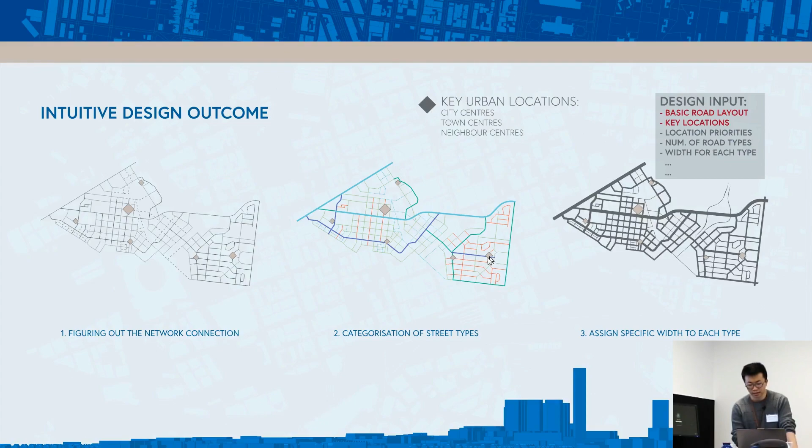Once we got the results, I ran a test against the connectivity from these key urban functions like the city centers and town centers, and generated a heat map, basically representing which road is heavily used. These blue paths are not very much used, so they become less busy, and we bring that information into changing or optimizing the road width. So that's the result in green.

So if you look at left and right, it's actually quite different. There's a huge difference between design by intuition and algorithm-generated outcome. Obviously, we're not taking this for granted and saying this is the most ideal solution. That's not the case because there are other factors, but at least that highlights the difference: when we think we need the road to be constantly wide across this whole site, when you measure the connection, you really don't need the road to be that wide.

Obviously, we need input from specialists from different disciplines like road designers, but this is just one example. At the same time, when a road type and width changes, the data is also getting updated. So this is mainly about the NDA, net developable areas of the blocks enclosed by the road network.

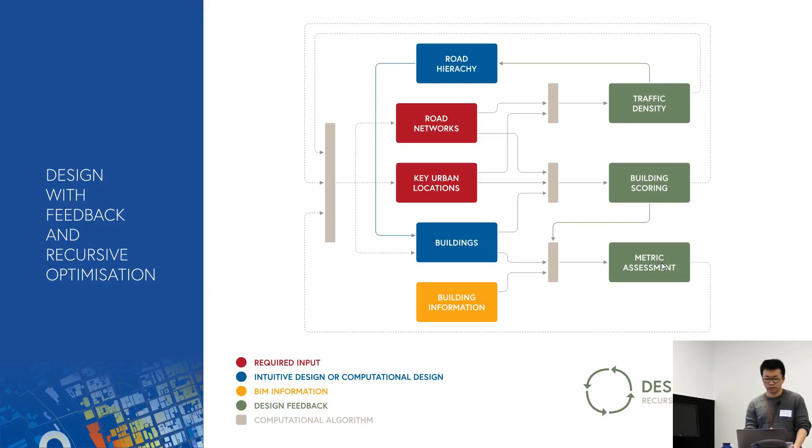So overall, they'll be able to provide a metric assessment—for example, we want to put a school somewhere when we're aiming to cover 75% of the residential communities within that area. So this is the metric assessment we're running. And this whole process is a recursive process, basically cycling itself until we tell it to stop, until we pick the ideal result we want.

Two parts about this project: quality and efficiency, as I mentioned in the very early beginning. We have functions of parametric city planning, traffic assessment, and data-based city function coverage study. So this is about improving the quality.

That's something the human brain simply can't do, no matter how much time or resource is invested. And for the efficiency part, rapid road network and building prototyping, BIM data exchange management, this is more about speeding up the workflow. You can still do it traditionally, but it just takes heaps more time.

So there are two key concepts used in this urban assessment. One is coverage, which throughout the whole project is more about walkability or traveling distance. In this map, we have square blocks representing urban functions, and diamonds are small buildings.

Traditionally, when people design something like a station and assess the surrounding coverage, say a coverage of 300 meters, they draw a circle from that point with a radius of 300 meters. But we know that's not the case, because the real coverage is going to be a lot smaller, depending on the complexity of the road fabric or how complex it is to travel from point A to point B. So the real result is pretty much an irregular polygon that we don't know in advance.

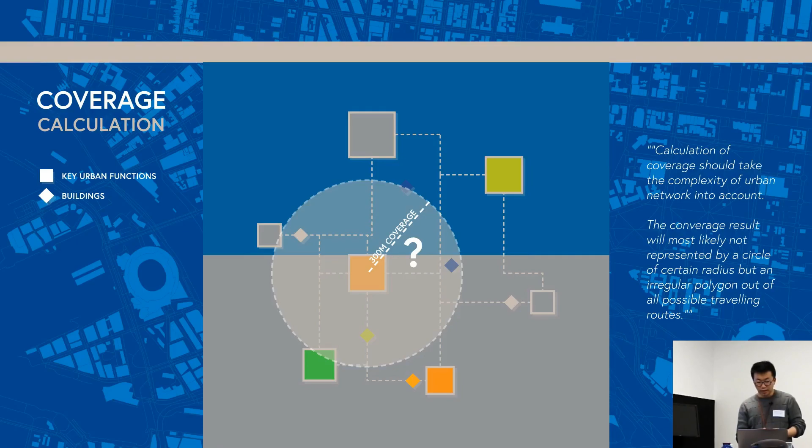But that actually makes a huge difference to urban design. This is a demo of how the real traveling distance is calculated. For example, we have an urban function with a design coverage of 600 meters, and these white lines with number tags show the actual traveling distance from this dot to the central urban function—here it's 521, and here 487. It spreads out, but obviously there's no coverage here because that's a lake, and the only connection across it is through these three bridges.

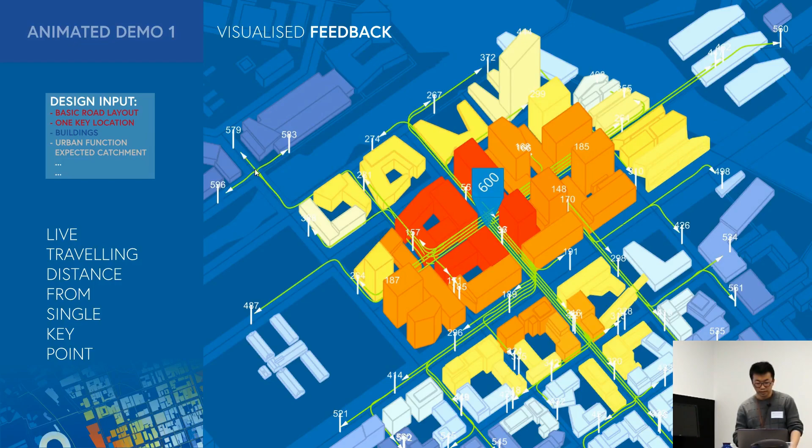Bringing the same concept to multiple points: we have a coverage of 600 and two small centers with design coverage of 400. It's the same concept applied to multiple urban functions.

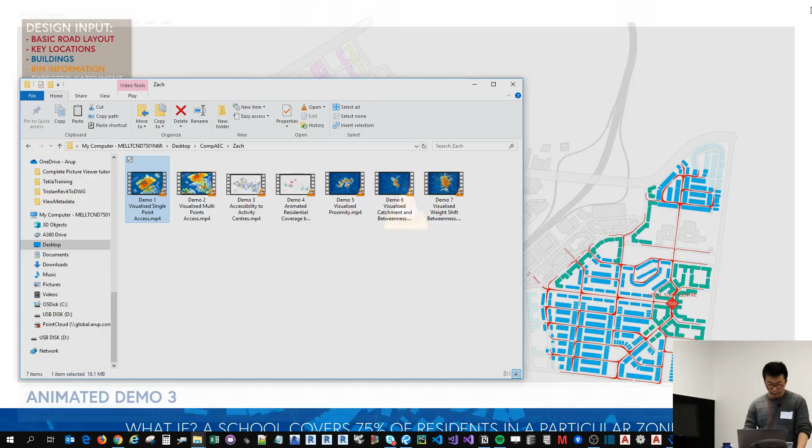I'll quickly show two animated videos. That's basically a traveling simulation from the center to the end, and the same concept applied from multiple urban locations.

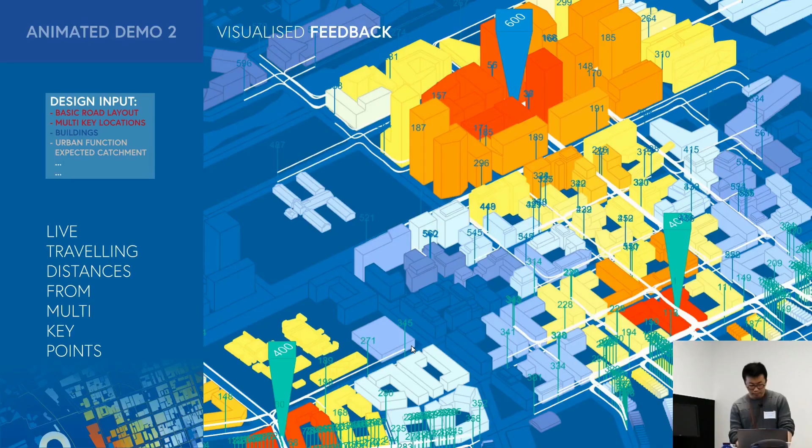Back to this urban design project itself: we brought in the BIM data and linked that function with the coverage testing model. In this example, we have a local town center with a design coverage of 1,000 meters of traveling distance, and the ends of these red curves show the extent of that 1,000 meter traveling distance.

These buildings in different colors represent different types—for example, green is medium density apartments, and blue is single family houses—and also show the percentage of service covered by this local town center. You may notice there's a bunch of houses at the corner that isn't covered. The solution for designers would be to either move this town center, add another town center, increase the design coverage capability, or change the road layout to provide better connections.

Now, all those inputs again need to be checked with the respective specialist, because, for example, you can't have an urban facility designed with a 5,000 meter coverage if you expect people to walk to the center instead of driving.

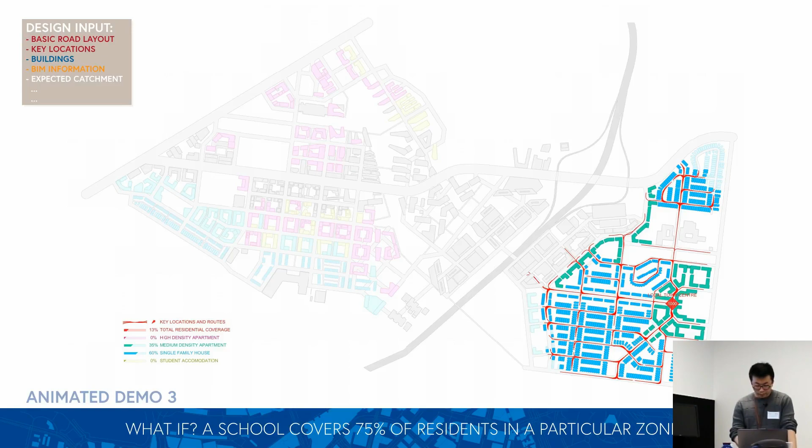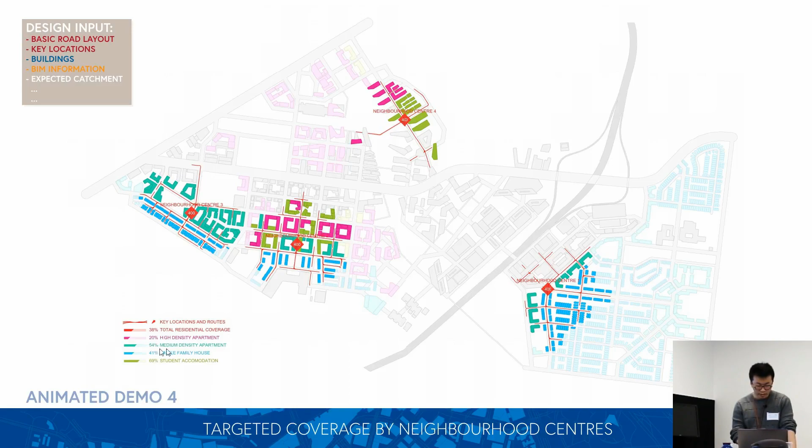Similar concept: four neighborhood centers turned on with 400 meters of coverage each, showing the percentage of coverage, and the same for community centers. Finally, if you have all functions turned on, that provides 100% coverage, but normally you don't do that because they belong to different categories, which I'll cover later.

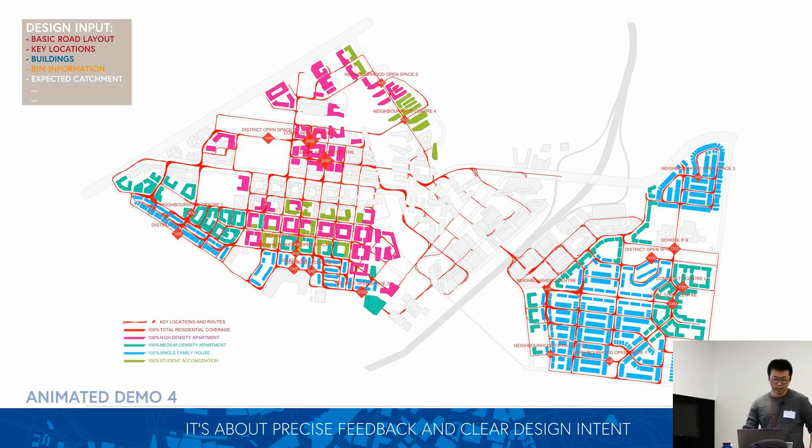Later, this kind of workflow derived from the original project into an R&D project, so we sought to replant it into another urban design project. I used the Melbourne CBD as my testing field. This picture contains 420 million calculations—lots of calculations. And there are two key concepts used in this scoring system.

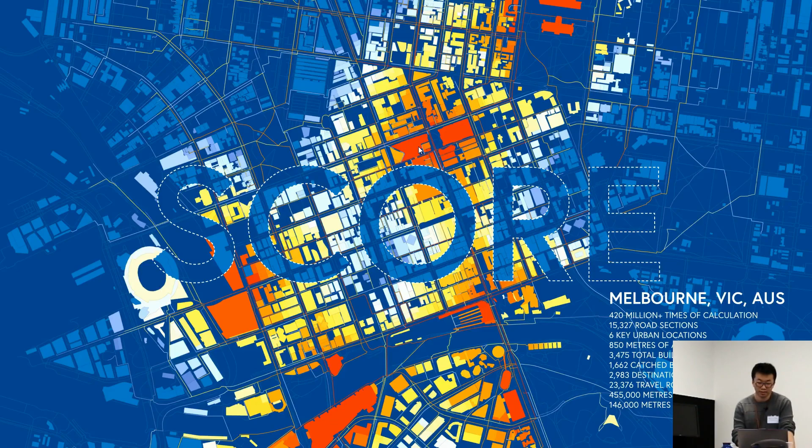This is about score. Each building with a different color has a score—the red color is a better score, and the cold, bluish color is a low score. And there are two key concepts.

One is proximity, the other one is betweenness. Proximity is primarily used to identify the level of accessibility from the urban element to key urban locations of a single category. Betweenness relates to multiple key urban functions with weighted considerations.

So my analogy would be getting milk. If you live close to a Coles or a 7-Eleven, you can get milk from either place. So as long as you live close to one supermarket, whether it's a big one or a small one, you get a nice score for proximity.

While for betweenness, it's more for the purpose of someone seeking to buy apartments in the city and deciding where to live. People who commute a lot might prefer living close to a train station interchange, and cultural lovers might prefer living close to Melbourne Museum, for example. There are different priorities being set between these testings, and it really depends on what sort of project you're designing and who the customers are that you're targeting.

So getting the concept visualized, it's the same map. For proximity, these buildings, because they're close to one of the urban functions, get really good proximity scores, and that one has the poor proximity score because it's not close to anything. But at the same time, for betweenness, this building actually has the best score because it has an average nice accessibility to all the surrounding urban functions.

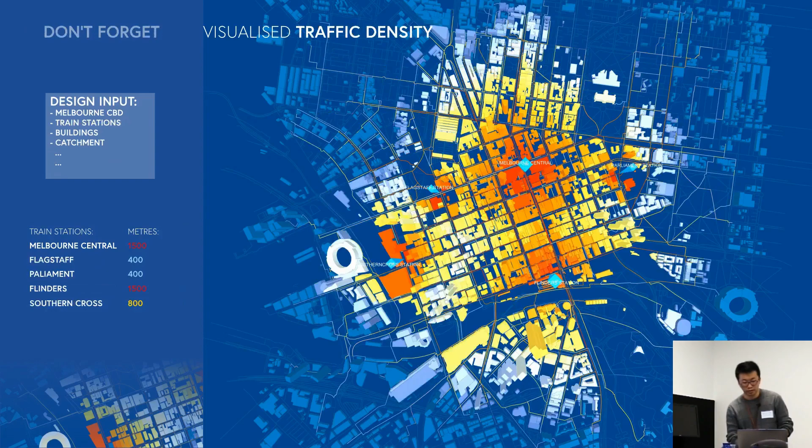It also provides a bit of density testing, as I mentioned in the beginning. All these curves in colors represent how busy the road is potentially. It's basically a calculation of when you do all these commuting simulations and you have overlap data. If one road is used 100 times and another road is used 50 times, then the one used 100 times is considered a busy road.

Obviously the building at the center, the kind of average of all of them, would have the best score. That means living here would have the best quality of life accessing all these facilities. Imagine you design an urban project and you move one of these functions around - you can instantly get the result of the most valuable buildings.

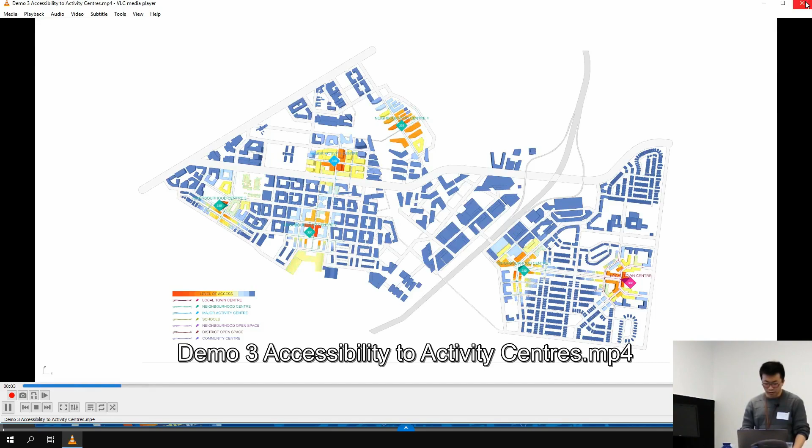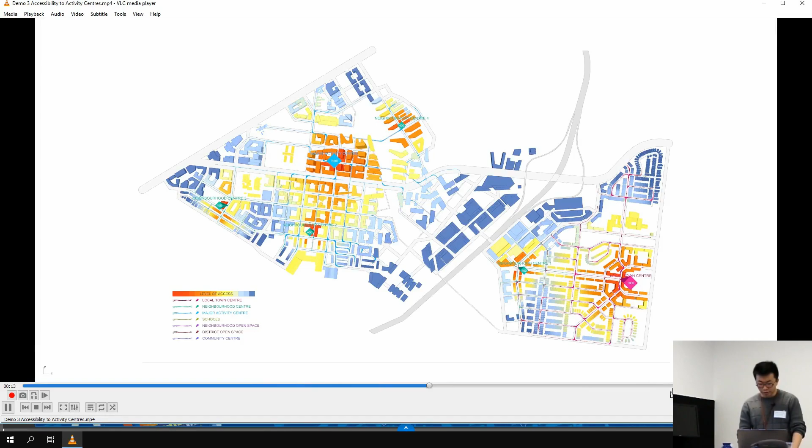When the coverage, or the design coverage number, grows, more buildings are covered. In the very end, when it reaches its maximum design coverage, you realize there are still a few blocks of buildings remaining in dark blue, meaning they don't really have good accessibility to all these design functions. So again, the solution will be either to change your road layout or move your functions.

And this is the coverage we talked about, utilizing the data from Revit. So estimating how much population is covered and what's the percentage of coverage for each type of buildings across the site, when you have these changing figures for the urban function coverage.

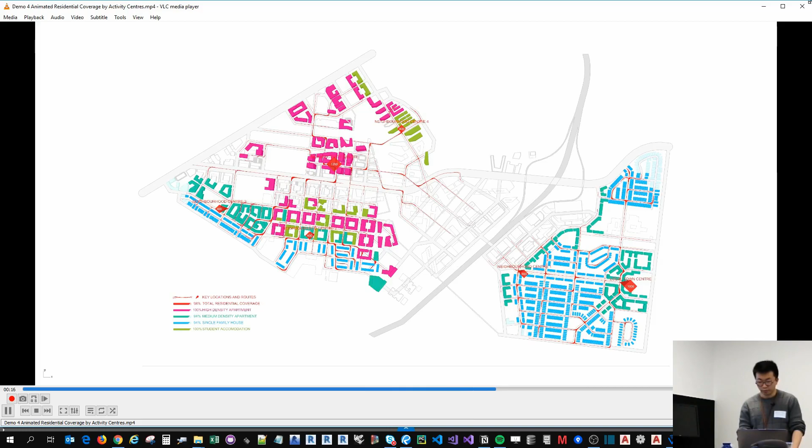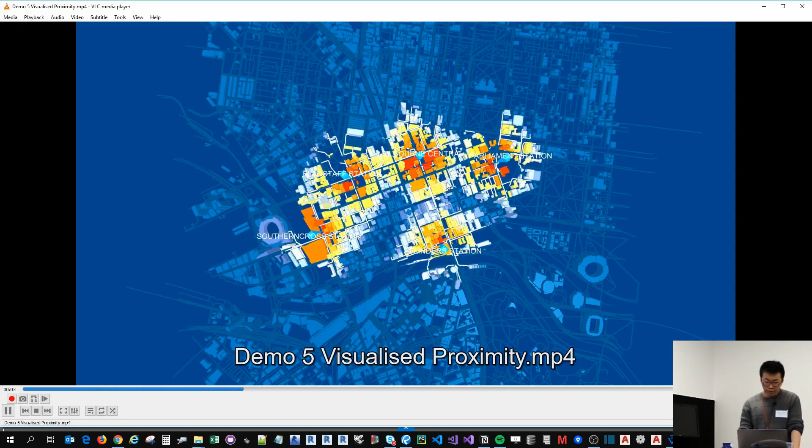And this is visualized proximity, those 5 train stations, and that's how they gradually cover up the whole CBD area, but still with different scores, heat map, and that's a visualized betweenness.

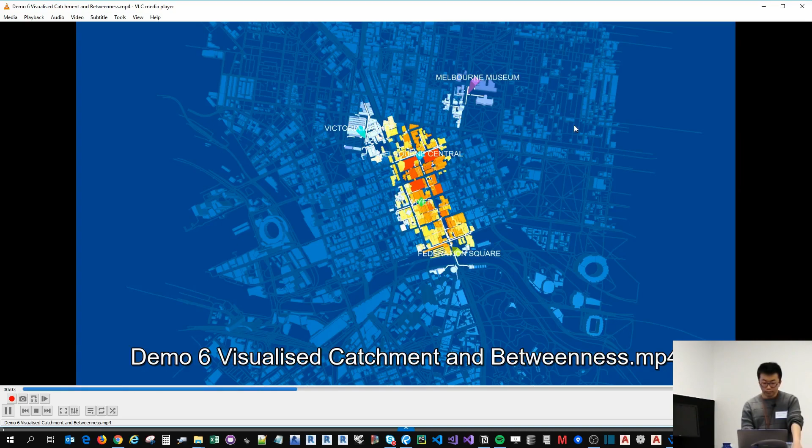So you may realize the heat part shifted from the center to the southern part. Then the last part is the weight shifts.

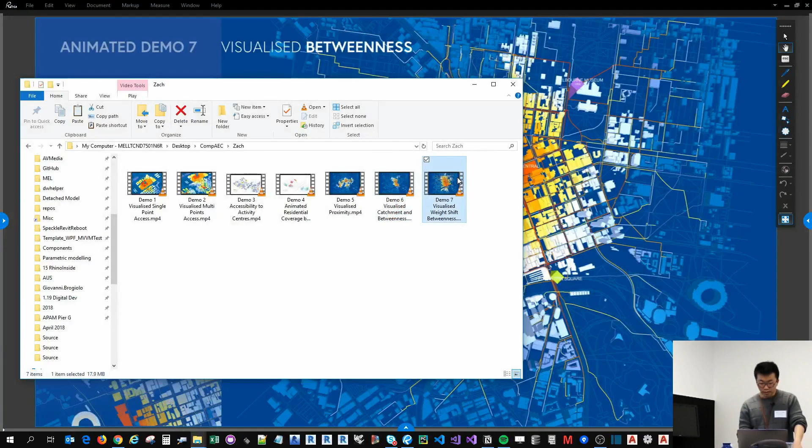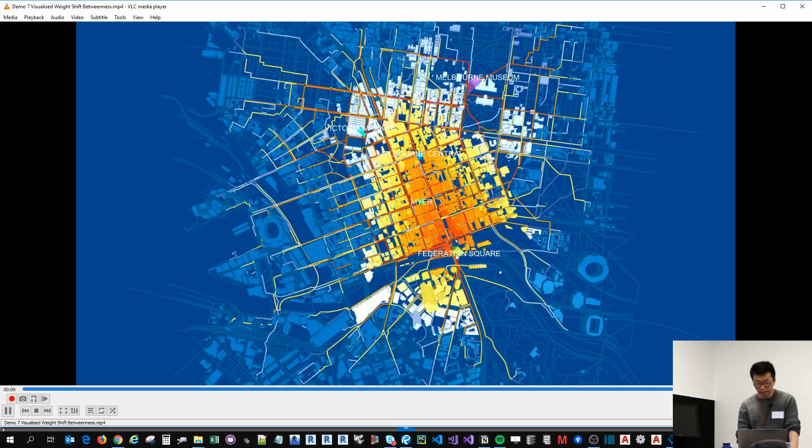So this is a clearer demonstration of how the reddish area shifts from center to south bank, because I have the Federation Square priority increased.

Alright, so then some digital engineering stuff, mainly focusing on improving the design efficiencies.

So first one is the network generation. Before I joined this project, we had designers manually drawing up the street layout. So each time they change the layout or change the width of the road, they have to jump into CAD and redraw it. So this is just a little bit basic but quite smart way of doing things.

So we get the network, and then we have assigned this width parameter for each type of the street. So when we update the layout, or when we update the width of them, this whole thing is going to automatically update.

And so that's the result of comparison. So when you increase the width of the 6 types, that also increases the areas, resulting in either gain or loss in net developable areas.

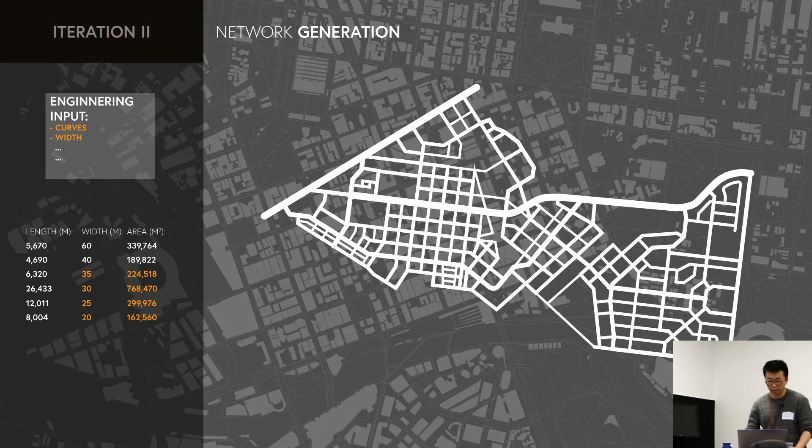And also the tree placement. This was originally created for the Revit modeling, where we want to plant trees. So first we've got the tree information from the landscape architect.

So they tell us what sort of strata size, what's the radius, what's the frequency of tree being placed for each type of road. Obviously on this model it avoids the intersection of road to keep a clear eyesight.

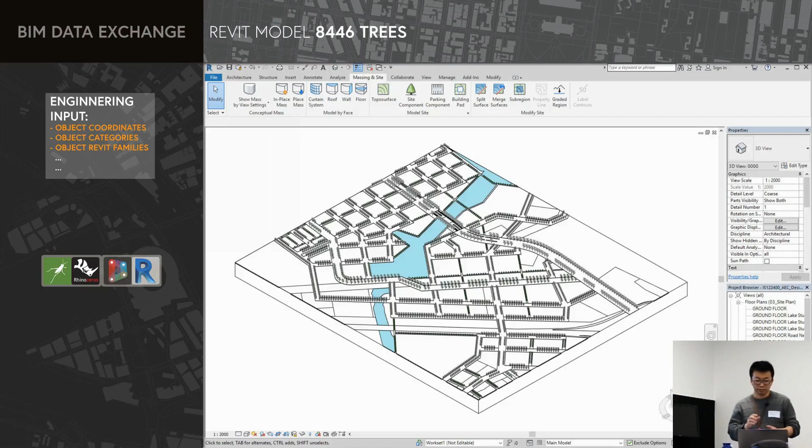And this map shows roughly 8,446 trees across the city, and I've got everything else turned off in Revit, and these are the trees placed in Revit, basically linking the data with the specially built tree families of different sizes and adjustables to reflect whatever we tested, and all these are done in Grasshopper.

Then some more exciting stuff is the automated buildings, because each time when a design changes, the road network changes, road width changes, it's going to make an impact to the developable areas in between. So your building design for the last phase, for visualization purpose, will no longer fit the updated layout.

And not even mentioning, we had a few drastic changes around. So that essentially means you have lots of distorted land that cannot fit the originally built buildings. But it's taken a lot of time to rebuild the buildings each time when the design changes.

So that's why the strategy we later adopted would be firstly dividing the whole urban site into a series of zones of characteristics. So for example, this is university character zone, commercial and city center, low density residential areas.

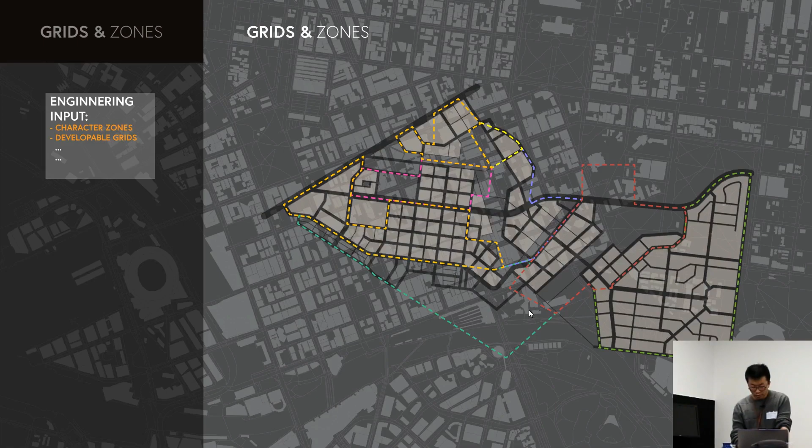Let's use the university area as one example. All these orange colored blocks are net developable areas for buildings.

And we applied a parameter to divide the grid up to a series of building footprints. And again, the size of it, how many buildings and how you orient them will be determined by the character of the current urban zone.

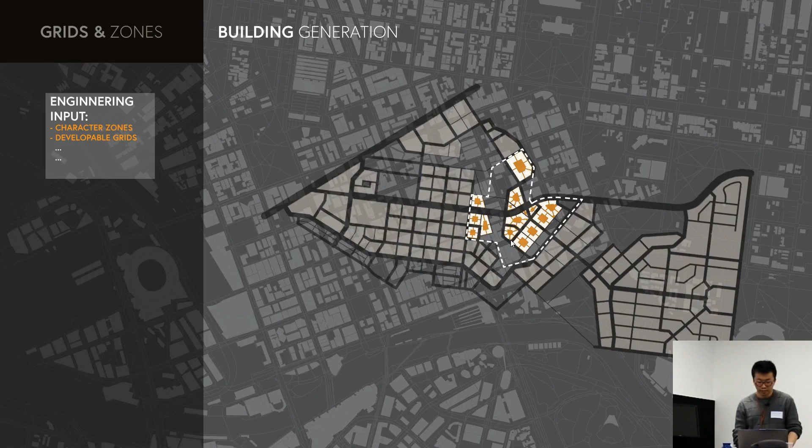And obviously with a series of chopping the sharp corners, eliminating useless space, and generate them with a series of other parameter inputs. And eventually when the road network changes or whatever changes, all this building will be updated accordingly.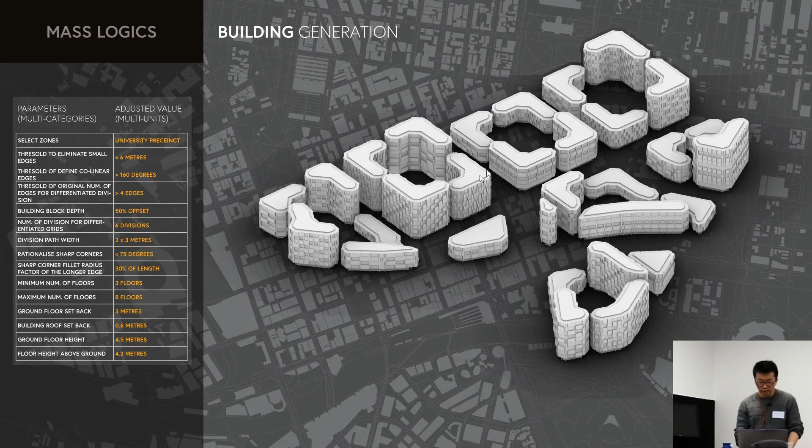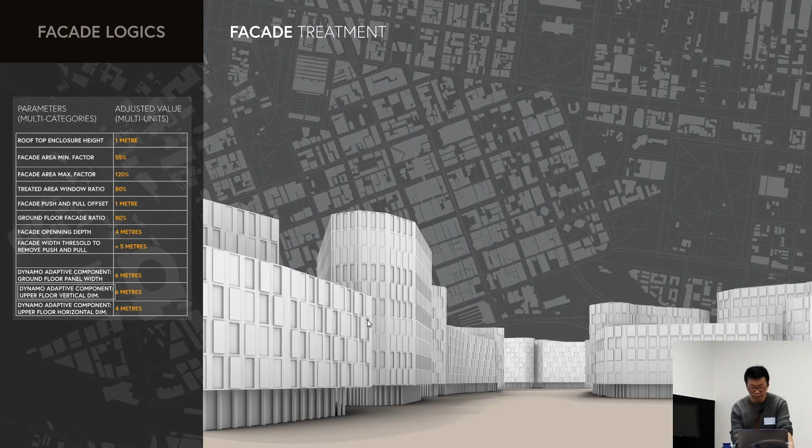And also apply another series of parameters for the architectural tectonics and also the facade treatment. So eventually we can get the model.

That was done in Grasshopper and a little bit of Python. Grasshopper is generally my favorite tool for complex geometries comparing to Dynamo. But we did use Dynamo to pick up those geometries and automatically build them as generic families and place them in the right location and coordinates in Revit.

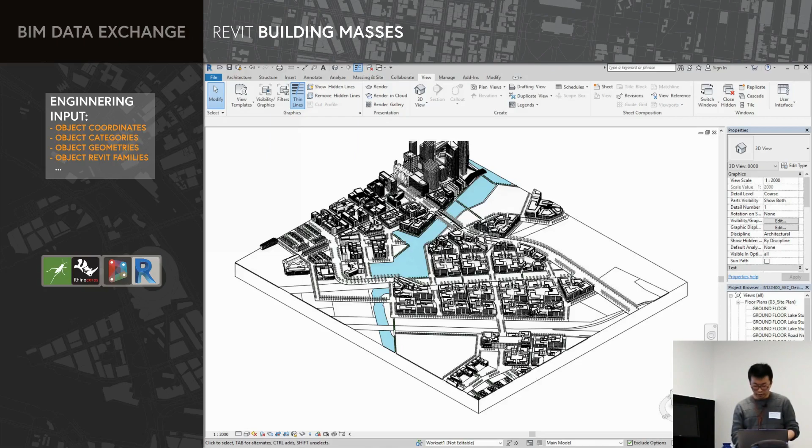So this is the result in Revit. A lot of people might think Revit is more accurate compared to Rhino, but generally speaking it's slow when updating these complex geometries. With the help of connecting different software and taking the best out of each, we achieve this increased speed workflow.

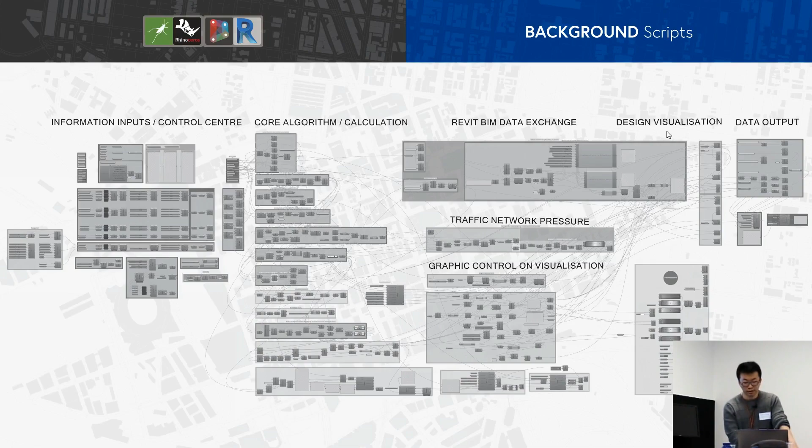And that's pretty much the end, just some script. This is one of the main scripts used in Grasshopper, controlling different parts. We've got information inputs, core algorithms, Revit BIM data exchange, design visualization, output, traffic testing, and graphic control.

So nothing in this slide is Photoshop. All of it is directly output from Rhino. And these are some Dynamo scripts we used.

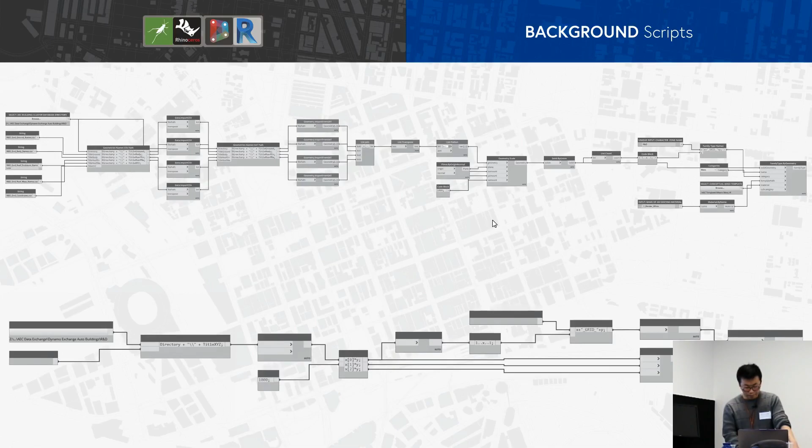There's a slight update I haven't put into the presentation, so I'm just verbally going through it. It's financial modeling. We aim to create profits for both the client and better socioeconomic values.

Here is my brief description: what if replacing a few properties with green open spaces like a park or lake can generate more profit while improving environmental quality in the surrounding area? We did this by incorporating the financial modeling data from our client's external consultant, KPMG.

They did a brief report with lots of data. Basically, if your building or certain type of property is close to an urban function like a green park, or close to a hospital, waterfront, or schools, each would have a different revenue uplifting factor applied to it, depending on the distance, with thresholds where it starts and stops.

And again, that data is synchronized into Revit. That's our way of delivering the actual model with rich information to the client. And this is an example of the report generator.

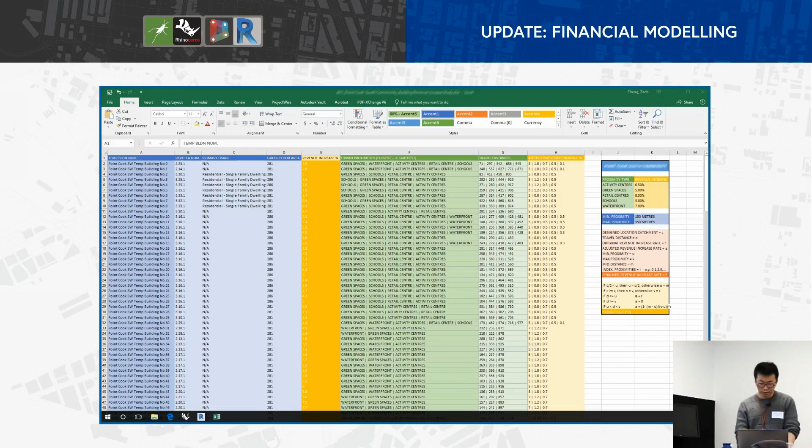The practical usage of that is basically you drop—just going back to the previous slide—for example, you drop another park there, and it's going to instantly uplift the values of the surrounding buildings. In graphic terms, it's going to light up the surrounding buildings.

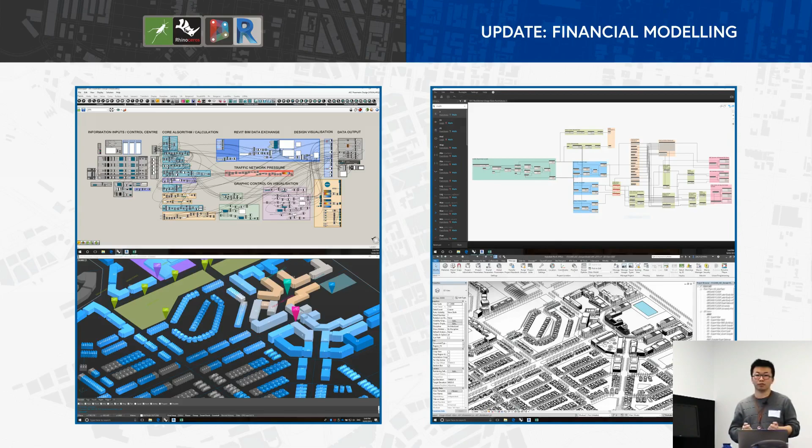If you demolish, for example, these 6 buildings and create a small park, you can basically calculate the revenue loss and compare that with the revenue gain from uplifting the original revenue of the remaining buildings. If the additional gain is larger than the loss, that means you can remove those properties, add a new park, creating better living quality for communities while creating more profit for your client.

So that's the end of the presentation. My belief in computational design is that it's basically about design ideas being enabled by computation power. It's not trying to compete against the traditional way.

I see myself as an assistant to experienced designers. I try to understand their design logic based on their years of accumulated experience, deconstruct it into more rigorous and rational mathematical formulas, interpret and build all these, and run the simulation for them. That's pretty much it. Thanks.